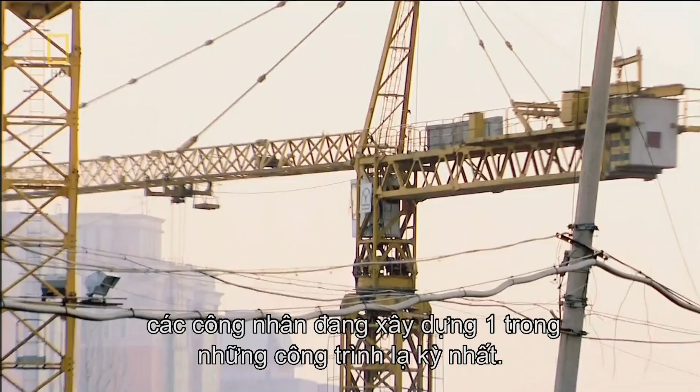In Beijing, China's capital, workers are constructing one of the most astonishing buildings ever built. When Beijing lights the Olympic torch, the eyes of the world will be on the incredible National Aquatic Center, a gigantic greenhouse that heats and cools itself, with a skeleton so strong it could stand on end and shrug off an earthquake, and a wafer-thin skin that puts out its own fires.

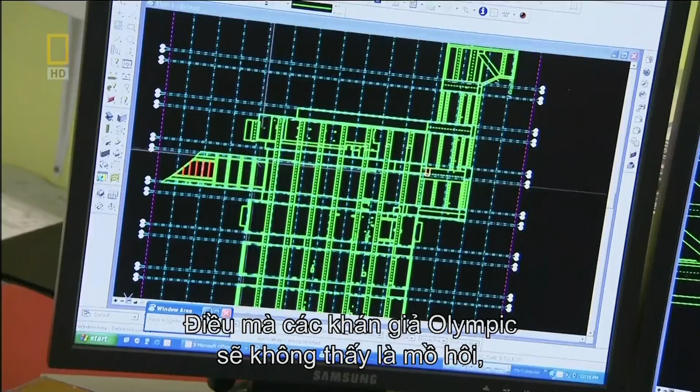Can you imagine building a building out of this? Essentially, we're building a building out of bubble wrap, you know? I have to say it's perfect. Okay. What the Olympic crowds won't see is the sweat, brains and guts that got this megastructure built. The struggle to believe in the incredible. I think we're all a bit stunned, really. But you want to do what? The lives put on hold. My wife didn't want to speak to me for a while. And the hard hat high wire acts 30 meters high. It looks a bit crazy, but it is safe.

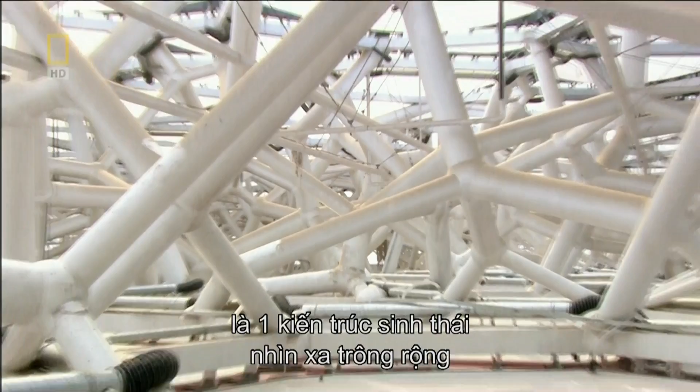The National Aquatic Centre's a visionary piece of eco-architecture and a brilliant monument to 21st century China. And it's also a tribute to a team that conquered fear and doubt and didn't quit until they'd made the impossible a reality.

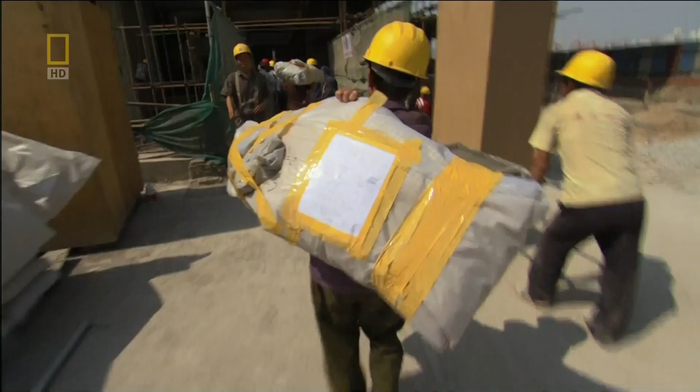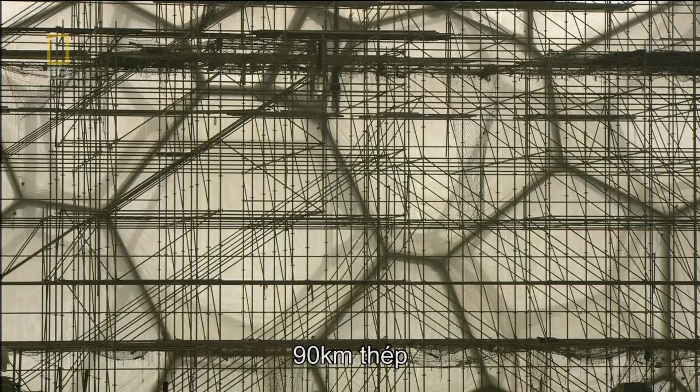Beijing. Building materials arrive at a construction site. Hardly unusual in this construction-crazy town. But these building materials and this building are different. Really different. 90 kilometers of steel, 22,000 beams, following no conventional straight lines, a maze of metal. That's enough steel to circle more than 200 Olympic running tracks.

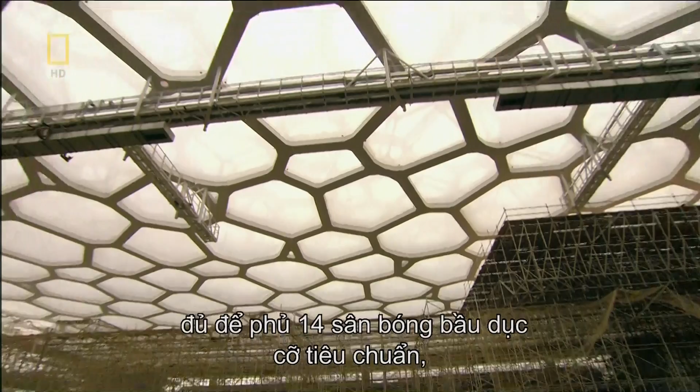And it's covered with plastic, 100,000 square meters of it, enough to cover 14 full-size rugby pitches, cut into cushions as big as 9 meters in diameter, but only 0.2 of a millimeter thick, nearly 8 times thinner than a penny. Officially, it's called the National Aquatic Center, but in the world of mega architecture, it's known as the Water Cube.

It's a fantastic honeycomb that looks as light and fragile as a tinker toy. But in reality, it weighs 6,500 tons. That's almost as heavy as all the metal in the Eiffel Tower. And inside its walls and ceiling, nothing but air. There is nothing else like it. Who came up with this amazing building?

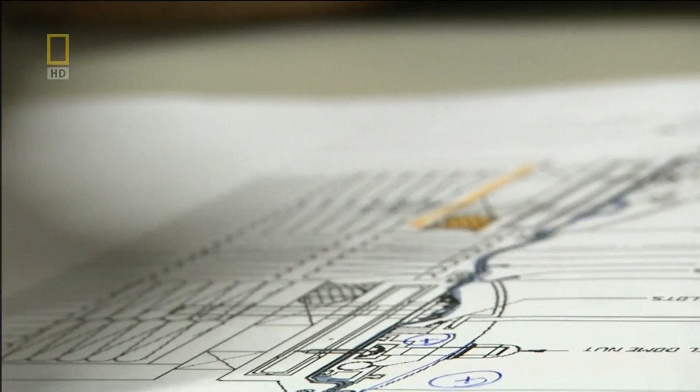Engineering team leader, Tristram Carfrae. Architects John Bilmon, Mark Butler and Chris Bosse. Fire engineer Marianne Foley. Structural engineer Mark Arkinstall. Building modeler Stuart Bull. Environmental engineer Haico Schepers. Chinese design team project manager Yi Hongtao. Part of a 100-strong architectural and engineering dream team. A team that envisions the original, the astonishing, and the apparently impossible, and made it into a megastructure.

Sydney, Australia, 2002. The architectural firm of PTW and the structural engineers of Arup, Australia team up with a Chinese consortium led by China State Construction Engineering Corporation and go after one of the world's most coveted construction contracts. From day one, the pressure's on, because they're literally racing the clock. A giant clock in Beijing's Tiananmen Square, counting down the hours and seconds to the 2008 Summer Olympics.

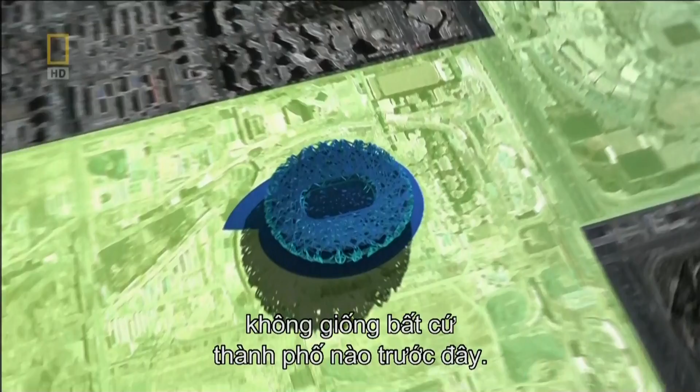China has invited the world's greatest architects and engineers to transform Beijing into an Olympic host city like none ever seen. The Chinese-Australian team's goal: to design and build the Olympics' prestigious swimming venue. And right away, they run smack into a heart-sinking challenge. The Olympic National Stadium, aka the Bird's Nest. A mind-blowing masterpiece only 1 kilometre from the site where the swimming centre would stand.

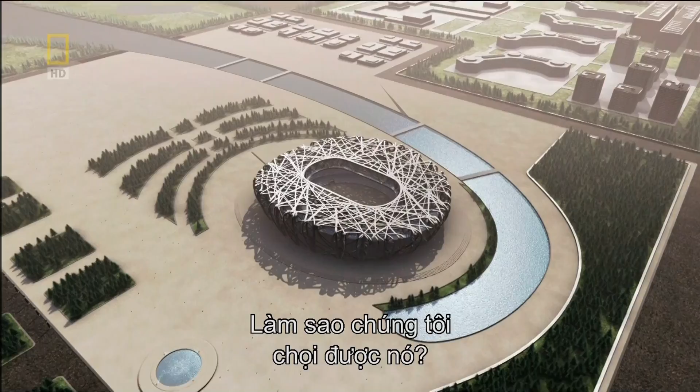When we saw the stadium design, I thought, oh, jeez, how can we match this? We were going to set our aims to create a building that was equal to the stadium, and then we saw the stadium design, and I think all our hearts fell on the ground for that moment. We just thought, oh. The team searches for a design that will knock the judges' socks off. And searches, and searches, and searches. And then, after nearly 6 weeks of failure, and with the completion deadline looming, the eureka moment.

Soap bubbles. Despite their random appearance, soap bubbles always cling together in regular patterns, in 12 and 14-sided cells, nature's most efficient division of space. And despite their flimsy look, an infinite array of connected soap bubbles has a geometry that's just right for a high-tech building. Strong enough to be the model for a megastructure.

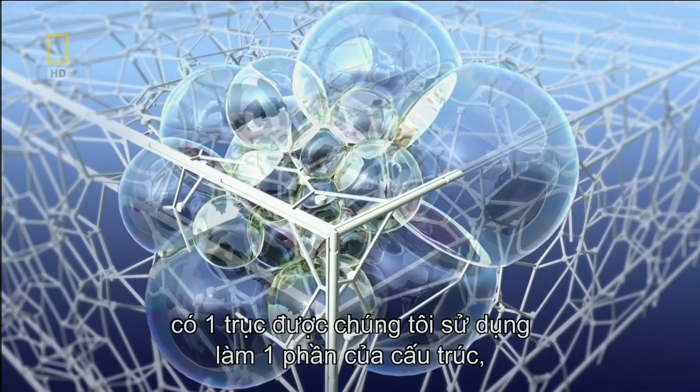3 soap films always come together at 120 degrees, like a Mercedes symbol. And along that line, where the 3 films come together, there is an axis that we can use as a piece of structure. So we can put a pipe down that line. Those lines always join 4 to a node. We can stick a joint in, we can pull in 3 more pieces, we get a structure. At last, the team has a design bold and original enough to win the competition. What they don't have is time.

I probably slept 2 or 3 hours a day. I took a nap when I felt tired, and an hour later I'd get up to work. Almost everyone in our team was the same. Everybody's eyes looked like rabbits, very red.

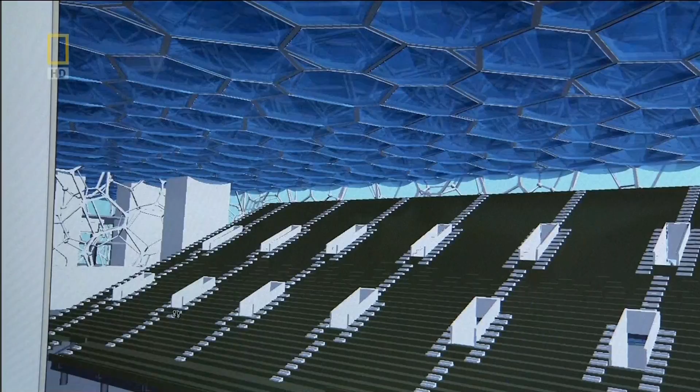We had tremendous pressure. After we agreed on the Water Cube's design, we had 5 weeks to prepare a building of this complexity. It was extremely hard. Hardest of all, making a model to show the judges what the finished building would look like. No one knows if modeling such a complex building in only 5 weeks is even possible.

Well, we were desperate at the time. We had 2 weeks to go, and we did not know how we were going to make our model. In Melbourne, they find a company that's at least willing to try. ARRK Australia specializes in a process called rapid prototyping, using a computer-guided laser to carve a model of a new product out of a vat of liquid epoxy, by etching it in layers only 1/100th of a centimetre thick.

Over the years, most of its clients have asked for models of products like water jugs, toothpaste tubes, and auto racing helmets. And then, in 2003, prototype manager Peter Lucas gets an urgent call from the Watercube team. They'd spoken to other model makers who said that they couldn't make this design. So they approached us and we were really their last port of call as far as getting a model made. We wanted to do it because it was a difficult model, and it was something a little bit different from the normal day-to-day jobs that we do.

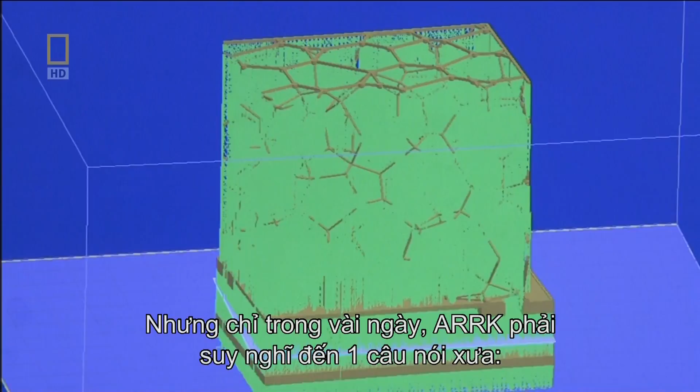But within a few days, ARRK is pondering that old saying, be careful what you wish for, you might get it. The machine kept crashing. The file was so big, it was like a 20 meg file, and most files we're dealing with are sort of 2 to 5 megs. The darkest hour was when we thought, no, we can't do this.

So what we decided to do was to grow the Water Cube in sections, and what PTW, the architects, did was that they came down with hand luggage, and we loaded each section into the hand luggage, and they flew it back to Beijing. I think the time pressure was down to hours at that stage. The finished model just meets the competition deadline. The team waits for China's decision.

They know that losing will be hard, but they also know that winning and having to build something never built before might be even harder. July 2003. After nearly 4 months of 7-day weeks and working day and night, the Watercube team gets the news. Voting online, the Chinese people have picked the Watercube design to be the Olympic swimming center. The team's reaction: rejoicing, followed by panic.

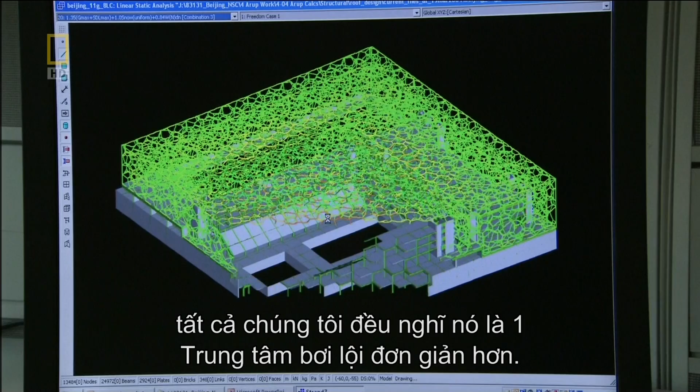And really it was only when they came back from the competition and actually had some images and this is what it's going to be. And I think we all had in our minds that it was some sort of simpler swimming centre. I think we're all a bit stunned, really. Like, you want to do what?

There's been an immense effort to win. And when you're in a winning mode, you don't necessarily focus on all the difficulties that are ahead. You want the job. You've won the job, we sit down, we look at it, and there is a bit of a heart sinking, I think, a sort of, oh my God, can this actually be done? And in fact, Chinese authorities were asking the same question. China had voted for a building like no other. Now, its designers had to prove they could actually build it.

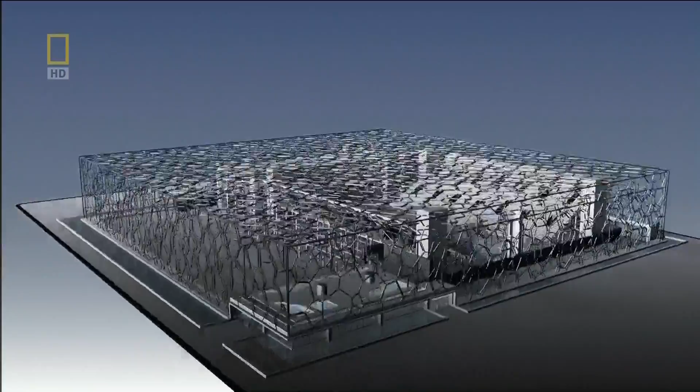The Watercube's gigantic steel honeycomb had 22,000 steel beams, following no conventional straight lines. A crazy-looking pattern. Its roof and walls would have to be 100,000 square meters of bubbles, made of something light enough and flexible enough to cover this apparently random maze of steel, but strong enough to stand up to Beijing's desert sandstorms, broiling summers, and sub-freezing winters. Glass, too heavy and brittle. Concrete, a design disaster. The answer came from way outside the box.

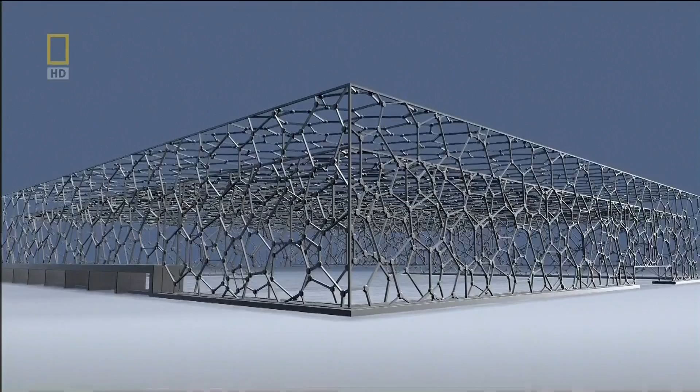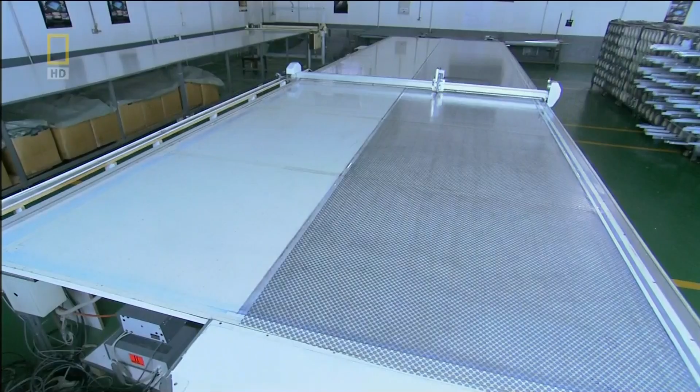Meet the amazing ETFE. That's a piece of ETFE. Fantastic, isn't it? Can you imagine building a building out of this? ETFE stands for ethylene tetrafluoroethylene. Chemists call it fluoropolymer. The rest of us call it plastic. So essentially, we're building a building out of bubble wrap.

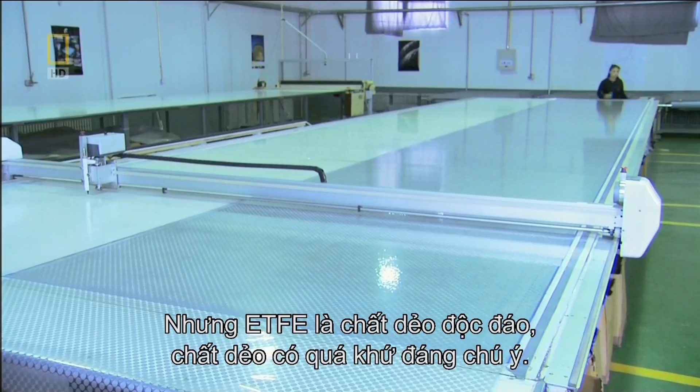It may look like freezer wrap or a dry cleaning bag, but ETFE is a plastic like no other. A plastic with a past. In 1938, an American chemist at DuPont Chemical Company was experimenting with gases and accidentally created a new substance, known around the world as Teflon.

Since 1960, Teflon's helped millions in the kitchen. But most people have no idea it hasn't always been a labor-saving coating on their frying pans. Originally, Teflon had a much more serious purpose. During World War II, scientists used it to coat the gaskets inside the first atomic bombs to prevent corrosion and ensure success. Just 50 seconds later, 15 miles from ground zero, the Enola Gay rocked by the blast.

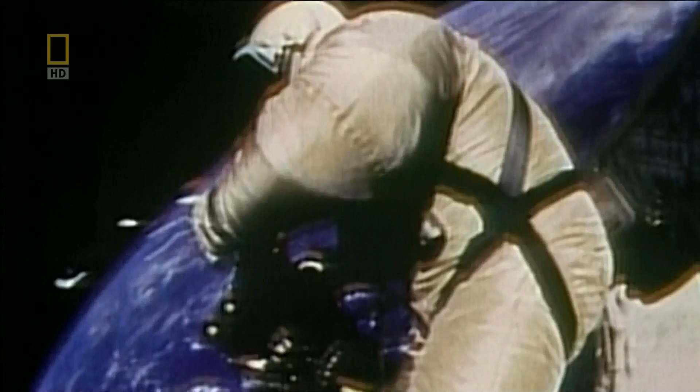By 1970, America was sending spacecraft and astronauts beyond Earth's atmosphere and needed to protect them against cosmic radiation. So NASA and DuPont tweaked Teflon's chemical structure and created ETFE. The 1960s and 70s also saw the rise of the geodesic dome and other architectural innovations. And it wasn't long before architects and engineers grasped ETFE's potential. The miracle plastic that had once helped transform cities into rubble would now help transform them into futurescapes.

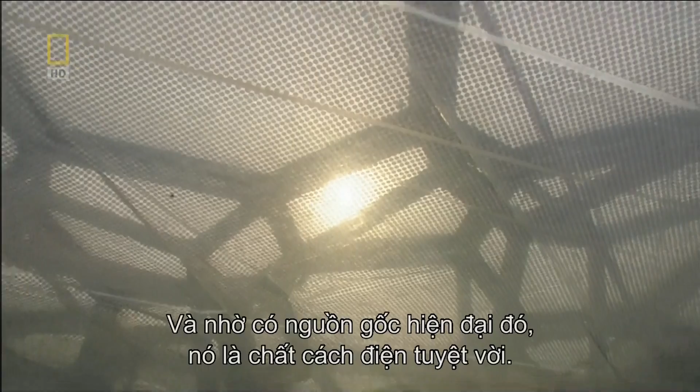The sun's ultraviolet rays can't hurt ETFE. Samples created decades ago still look brand new. It's just 1% of the weight of glass and much more flexible. Incredibly, it's also more transparent than glass and lets in more light. And thanks to its space-age origins, it's a superb insulator.

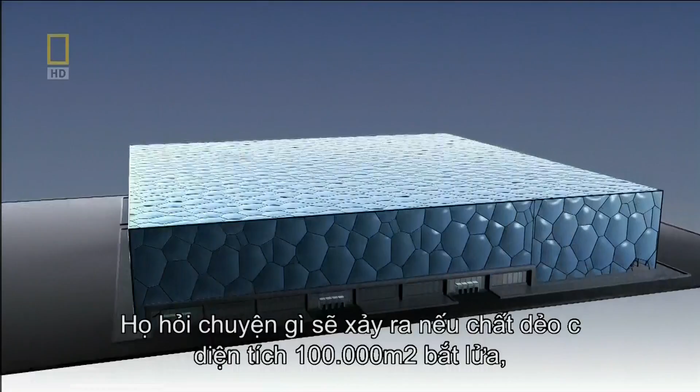Today, ETFE covers some of the world's most impressive structures, like the Eden Project in Cornwall, England, and Munich's Allianz Arena, host site of the 2006 World Cup. But the Water Cube's 100,000 square meters sets the record as the biggest ETFE construction in the world. An impressive statistic that worries Chinese officials. They ask, what will happen if 100,000 square meters of plastic catches fire, with 20,000 Olympic spectators inside?

To win approval for ETFE, Arup's lead fire engineer, Marianne Foley, has to change some minds fast. And the first mind she has to change is her own. When I was first presented with, this is what we're going to do, it's like, you've got to be kidding, you're going to cover the building in plastic. Because, obviously, there's going to be huge flames licking up the side of the building, and that's not going to be good. We all have visions of what plastic may do in the event of fire, and we're envisaging big fires and raining flaming droplets down, and plenty of plastics behave like that.

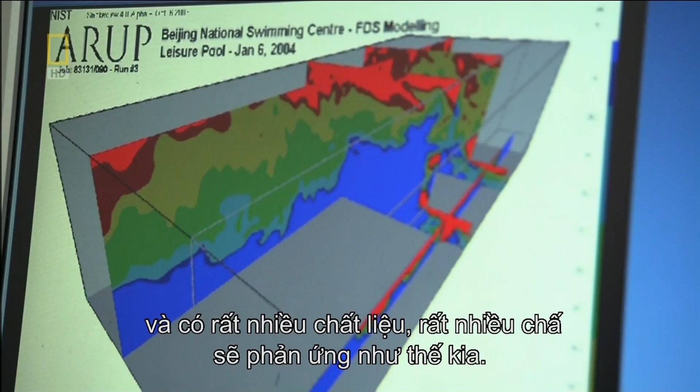But Foley soon discovers that ETFE doesn't behave like other plastics. She researches the worst-case scenario, a fire in the Water Cube with some 20,000 Olympic spectators inside, and asks, what will those 20,000 people see? But you're not going to see what the movies show you, for example, of flames licking up the outside of a building and the towering inferno kind of stuff. You're not going to see any of that. The likelihood actually is you would see nothing at all, which is a terribly boring answer.

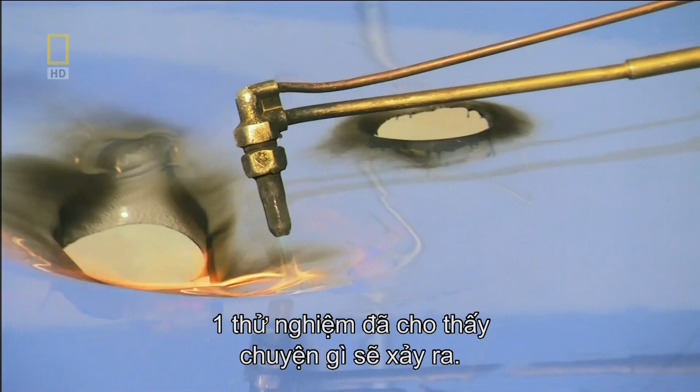Inside the cavernous Water Cube, flames will have a hard time reaching the ETFE skin. But what if they do? At the Water Cube's ETFE factory in Beijing, a demonstration reveals what will happen. If a fire does reach the ETFE skin, the skin won't burst into flame. Instead, ETFE will just melt away. But only as long as the flame stays on it. Take the flame away, the melting instantly stops.

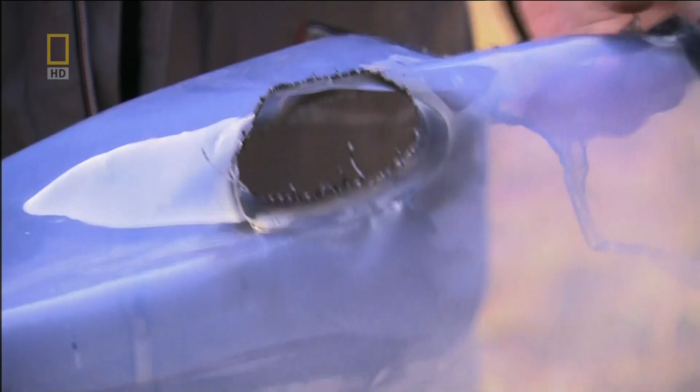It looks like magic, but ETFE expert James Murphy knows it's just good chemistry. ETFE has a chemical in it, fluorine, sort of like the chemical that's in your toothpaste, and that puts out the flame. The fluorine in the ETFE prevents enough oxygen from being present to sustain fire. No matter how long fire touches it, ETFE doesn't burst into flames. It melts and drops away. And that's a big benefit because it allows all the harmful gases and smoke out of the building, and that allows people to see and get out safely.

What you're essentially going to see is what looks like a very large piece of cling wrap shrivelling away from a lighter flame. And it's just going to shrink away, and you're just going to get a hole. And then people evacuating. The design team proves that if the Water Cube's skin caught fire, it will simply wrinkle up and blow away.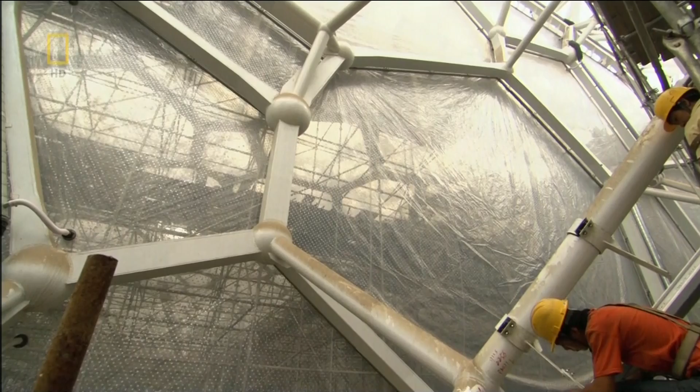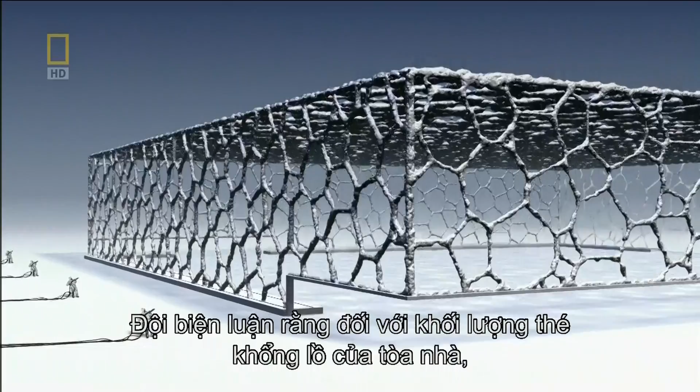But what will happen to its immense steel skeleton? A fire can make steel so hot it weakens and gives way. China's fire code requires spraying steel with a fire-resistant chemical coating. Very effective and very ugly. The team argues that given the building's vast amount of visible steel, fireproof slurry will make an Olympic masterpiece look like a gigantic bowl of porridge.

It's a terrible material, actually. The idea that we would have had to do that to that building, it just makes me laugh, actually, because there's just no way. But to win that argument, the Watercube team has to prove that their steel honeycomb will survive a fire on its own. And that means burning some midnight oil.

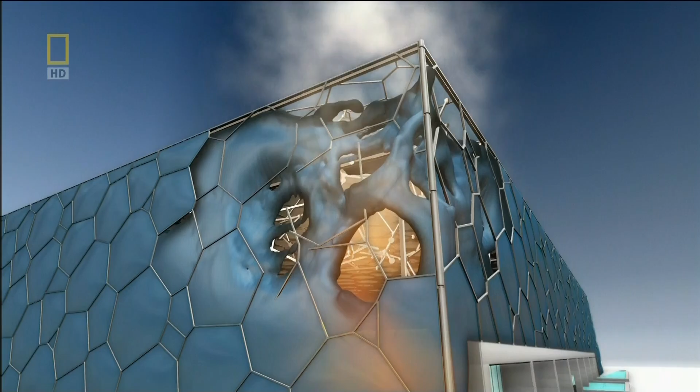In here that we have the problem with the two beams. We had to look at how fires in the building would affect this very intricate structure. That level of complexity was not something I'd done before, and it's not something you would normally do. Foley painstakingly analyzes the Watercube's design to determine where fires are likely to break out and what part of the building will be most vulnerable to fire, while her fellow engineer, Mark Arkinstall, calculates how strong the steel frame will have to be to withstand a fire

without a protective coating. My role as fire engineer was to work out what sort of fires we could have, like how big were they going to be, how close to the steel would they get, and from that to work out what a temperature distribution would be. So what temperature was it going to be where on that steel? And then Mark took over from there and he worked out what that would do to those elements that were exposed to the high temperature, and where that temperature was such that the element would no longer carry the load. If that stopped doing that, what did the rest of the structure do?

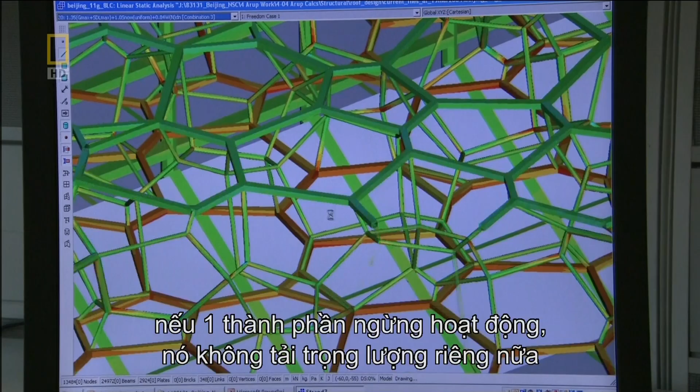To their vast relief, this analysis reveals that the Watercube's steel honeycomb will survive a major fire. If any beams melt in extreme heat, the surrounding beams will shoulder the load and keep the building from collapsing. 20,000 Olympic spectators inside the Watercube are now looking safer.

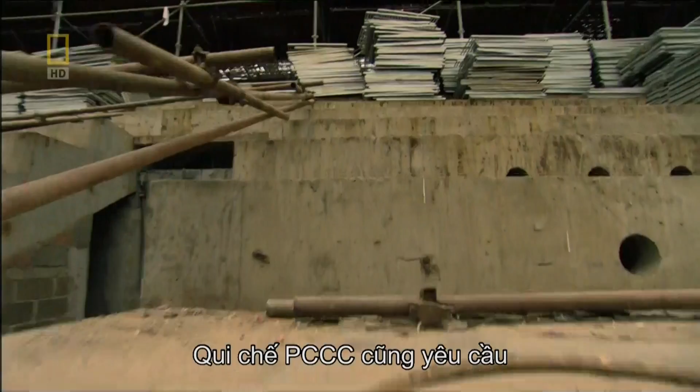But the Watercube still has to satisfy one more fire regulation, and it's another potential design wrecker. The Chinese fire code requires a building holding 20,000 people to have 200 meters of exits, nearly the same length as one side of the Watercube. The code also requires public buildings to have fire-protected enclosed spaces like stairwells leading to fire exits. But the Watercube encloses nothing. Inside, it's a vast open space. So the design team goes back to the drawing board and goes the extra mile to convince authorities that their design is safe.

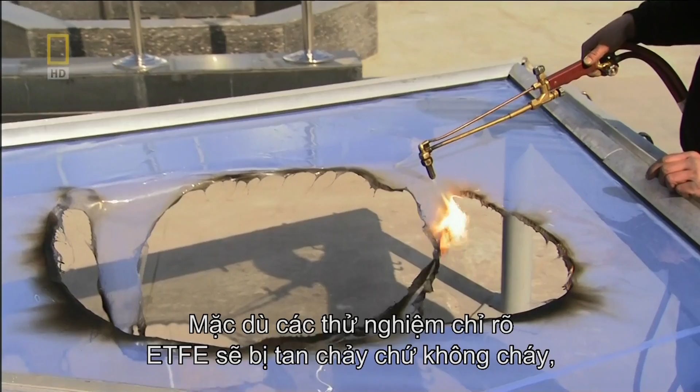Even though tests show that ETFE will melt, not burn, and will allow smoke to escape a burning Watercube, Marianne Foley models the probable pathways smoke and flame will take and positions sprinklers and smoke extractors along those routes to make doubly sure that fires will go out and smoke will be sucked out of the building. She argues that with these extra safeguards in place, enclosed escape routes and 200 meters of exit doors aren't necessary

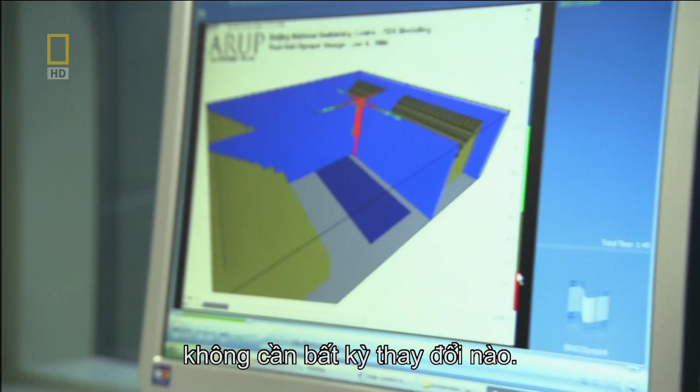or even effective. People don't actually use those. They don't like them, they don't know where they go, they're afraid of them. We all like to leave a building the same way we came in, or at least a way we've mind mapped. So we know how to get out, we know where we're going to go, we know what it's going to look like. Impressed with the team's arguments, Chinese fire experts approved the Watercube's design without any changes. It was wonderful. Our peer reviewers said that we had essentially done state-of-the-art engineering, that they thought what we'd done was fantastic and that they fully supported it, which is nice to hear.

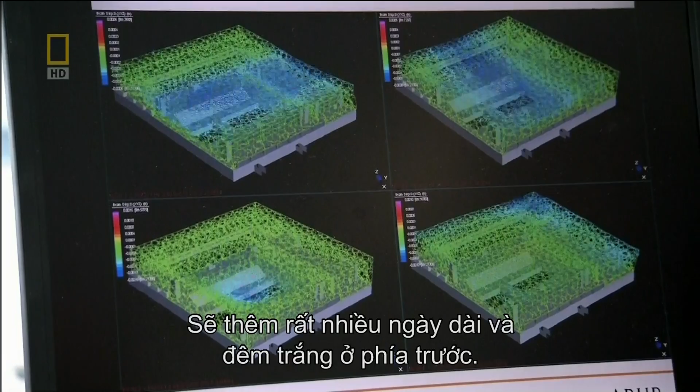But fire isn't the only thing the authorities were worried about. Can the Watercube's gigantic honeycomb survive in one of China's deadliest earthquake zones? There will be plenty more long days and sleepless nights to come. In 1976, a single earthquake killed 240,000 people, only 180 kilometers from Beijing, where the Olympic Swim Center will stand. With the Olympic countdown clock ticking, the heat is on to prove the Watercube can survive an earthquake.

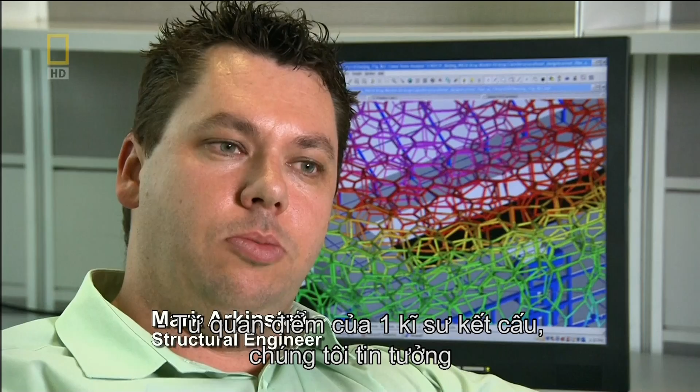And Arup engineer Mark Arkinstall is definitely feeling that heat. From a structural engineering point of view, we had to be confident that this very complex building would stand up in Beijing with earthquakes, wind, snow, you name it. And it's not just like designing a warehouse. It's actually the Watercube. It's just so much more than anything you'll ever see anywhere.

The challenge: how to make the Watercube's steel honeycomb strong enough to stand up to high winds, dust storms, snow and earthquakes, but light enough so it won't collapse under its own weight. After cyber testing 190 different scenarios, the team proves that despite its resemblance to the world's biggest tinker toy, the Watercube will fare extremely well in an earthquake. But one more challenge remains. The Watercube's builders need a 3D computerized blueprint, a virtual model that assembles the entire building in cyberspace.

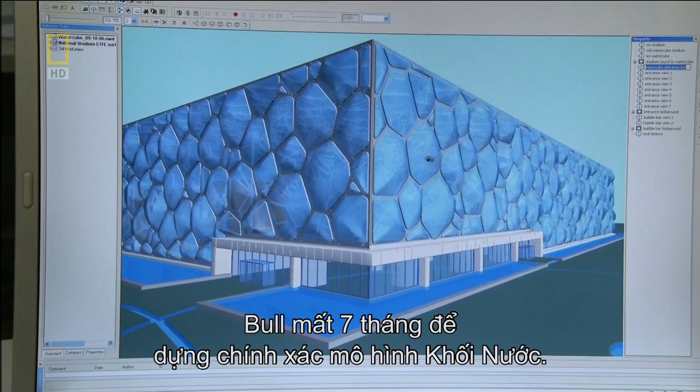And it's up to building modeler Stuart Bull to make that happen. I was scared silly. I knew that as the job went further, it would get harder for me personally. Bull has 7 months to accurately model the water cube. That may sound like a lot of time, but not for a building made of 22,000 irregular steel beams.

You then have the stress and thinking, right, I've got to get that done. I've got to get that done now. Why doesn't this work? Go back to the beginning. You get it to work the first time, but it doesn't work the second time. Why doesn't this work? We broke so many computers. They physically stopped working. It was not funny. My wife didn't want to speak to me for a while. Just puts me away in the spare room and say, well, you can come out when you're finished.

Several months and several dead computers later, Stuart Bull is out of the spare room, and the water cube's builders have accurate blueprints. Now they have to build it. Construction starts in December 2003. Workers pour the immense foundation, then begin assembling 22,000 beams of steel. It's a mega challenge, and they tackle it head on.

By August 2005, the water cube's gigantic steel lattice looms above the Olympic green. It's time to cover it with ETFE. And while building its massive skeleton calls for heavy lifting, manufacturing its super thin, super light skin requires some serious mental gymnastics. At this Beijing factory, workers are transforming huge sheets of ETFE into 3,500 water cube pillows. Every one designed in Germany.

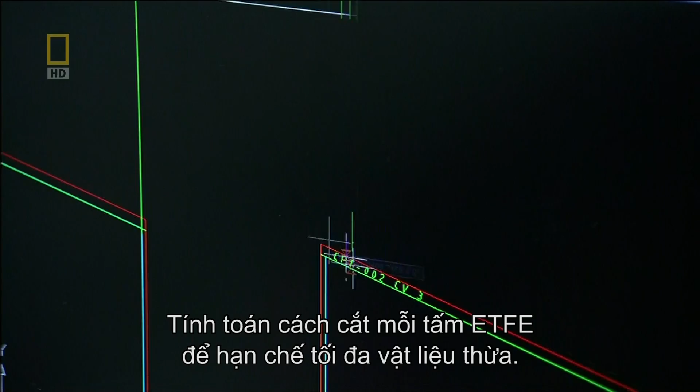In Beijing, technicians translate each pillow's unique dimensions from a German computer program to a Chinese database, calculating how to cut each piece of ETFE with the least amount of wasted material. While other workers stretch huge sheets of ETFE over a giant vacuum table, sealing them flush with the surface. Then, the computer program guides a blade as it cuts each pillow to its exact dimensions.

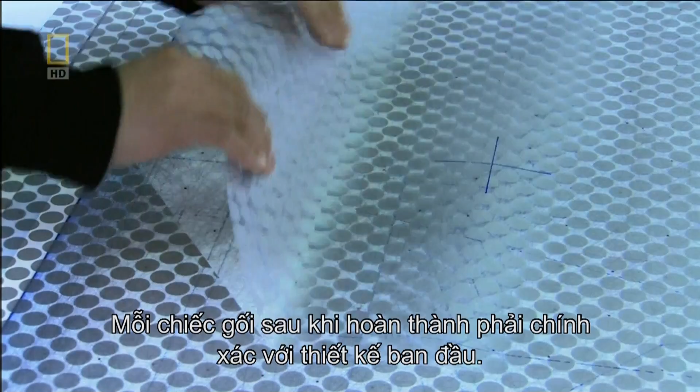Every finished pillow must be exactly as it was designed. For factory owner Stefan Lehnert, that meant some sleepless nights when manufacturing began. The thing is to have these cushions, every one of them, manufactured to the precise dimension, have it done on the right day, in the right position, for the team to be installed in time.

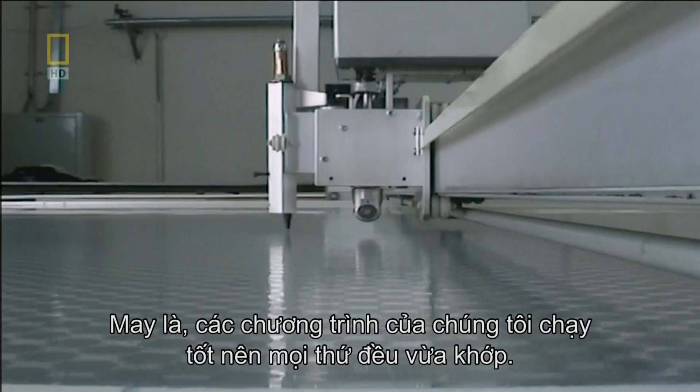If there was one thing wrong, it would have been wrong for every single cushion, which would have been a technical disaster, but also a financial disaster. Luckily enough, our programs seemed to be all right, so everything did fit. And actually, out of the 3,500 cushions, we had to do one new cushion because we actually did make one production error.

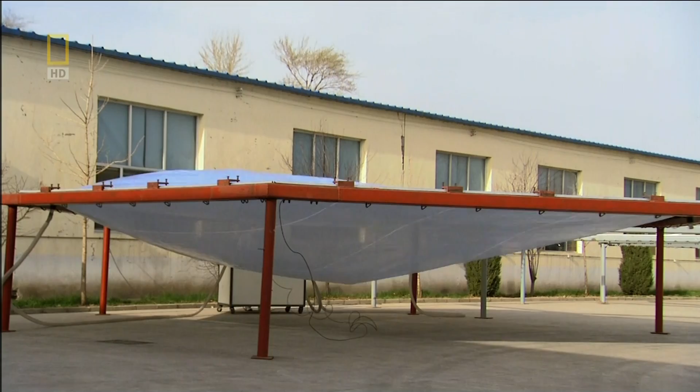From the moment they're cut to shape, keeping track of the pillow pieces becomes an obsession. They're numbered to match the water cube blueprints and stored in identically numbered bins. Workers weld a rope into each pillow's edges so that they can be clamped into an aluminium frame. Last step, quality control. The factory tests, installs and inflates every pillow. If anything's wrong, now's the time to find out, before it's delivered to the water cube. Every mistake costs time, and time is running out.

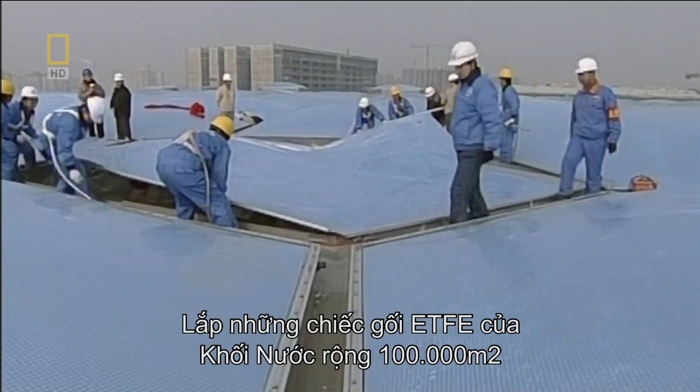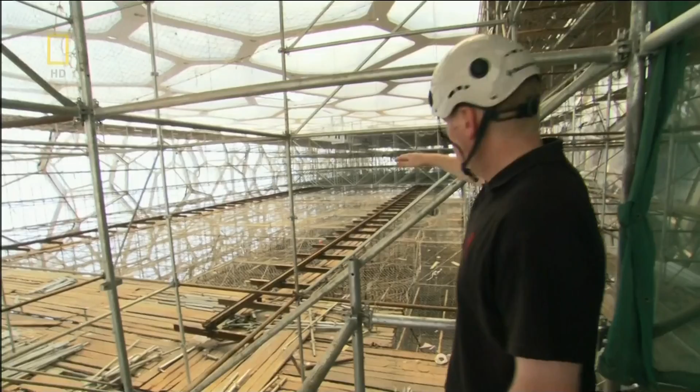Installing the water cube's 100,000 square meters of ETFE pillows isn't any easier than making them. James Murphy manages ETFE production and installation for the water cube. To get his ETFE pillows to their positions, workers must erect a massive scaffold out of hundreds of thousands of pipes. We built a rolling scaffold, and we do literally 1/3 of the building.

We put these rails in place, we finish our work in this area, and then we push all of the scaffold forward on the rail. And then we mobilize in that area, we finish that work, and we repeat the process again. The scaffold is safe. It looks a bit crazy, but we've been at it now 2.5 years, so it is safe.

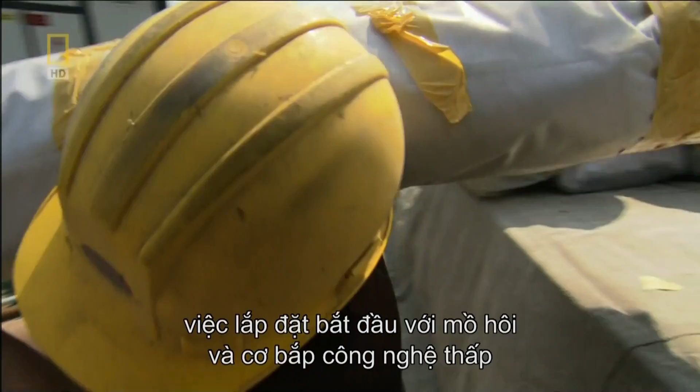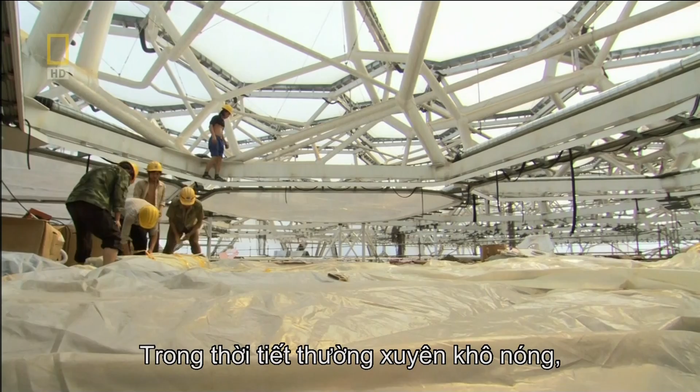Once the scaffold's in place, installation begins with some low-tech sweat and muscle, as workers hand carry the ETFE pillows over 30 meters up. And they do sweat. At the top of the scaffold, the temperature under the roof is about 10 degrees hotter than the floor where they started. In summer, it can reach over 50 degrees. In this often searing heat, workers must carefully complete the complex process of blowing some of the world's biggest bubbles.

First step, unfold the ETFE pillow and rotate it until it matches up with the frame and the steel structure it was designed to fit. Next step, clip the pillow into the framework, a critical step that's got to be done right, because the steel frame stretches the installed pillows tight in a gigantic web, balancing force and counterforce.

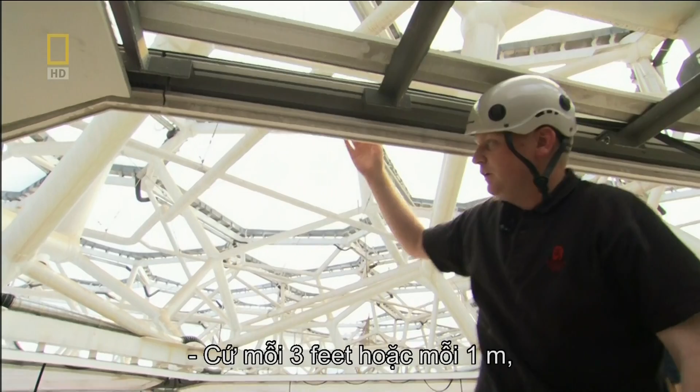You can get the equivalent of every 3 feet or a meter, about the weight of one Volkswagen Beetle pulling horizontally. That force is balanced, counterbalanced by a force from this other cushion over here coming through that bracket. So everything balances out, and that makes it an extremely efficient system.

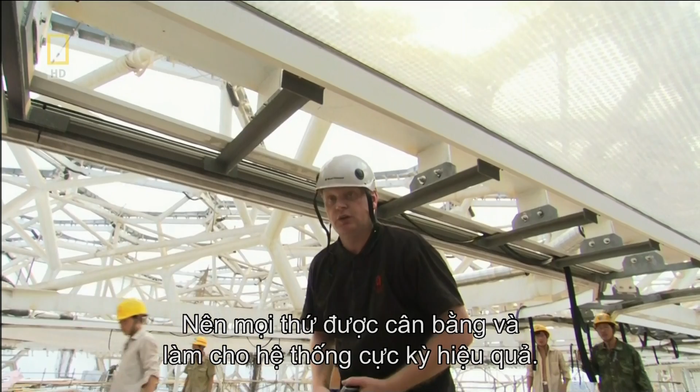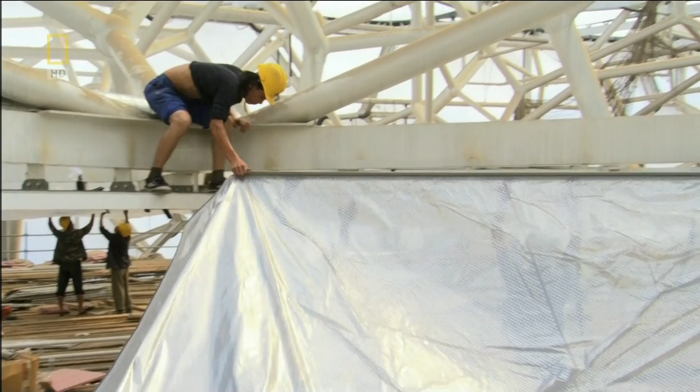Building the water cube means doing this 3,500 times. An impressive amount of work. But it's the pillow inflation system that reveals some of the water cube's most ingenious eco-engineering. Air is part of the structure.

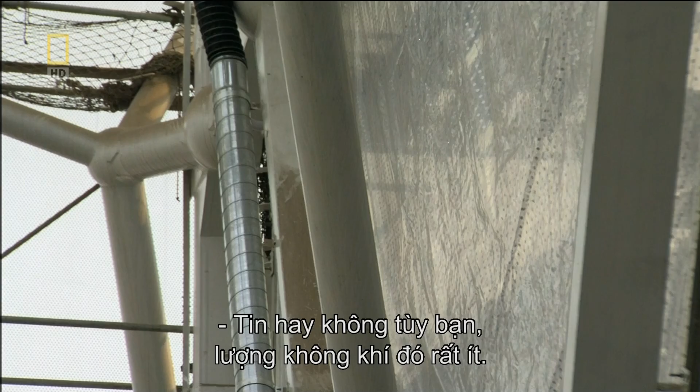The cushion is not a structural cushion without air, so air keeps our building up, which is fundamentally different from all other building systems used in the world today. And believe it or not, it's a very small amount of air, so that makes the power consumption extremely low, equivalent to your refrigerator in the kitchen. So you get very large surface areas of cushions filled with air very cheaply.

So you can see here at the base we have a big pipe that branches into a smaller pipe, and the further we go up it gets smaller. That's mainly to save on materials and to make the building more environmentally friendly, not to dump energy into the materials when it's not required.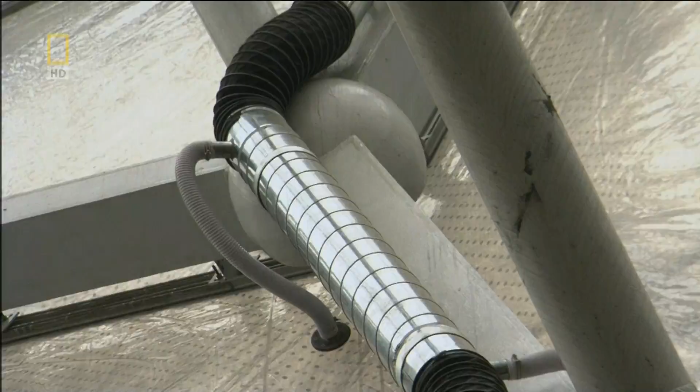But a building that's 30 meters high and 70,000 meters square must surely need an energy-gulping mega pump to keep 3,500 pillows inflated. Wrong. The water cube's divided into 18 inflation zones. Each zone has its own fans that send air to its cushions.

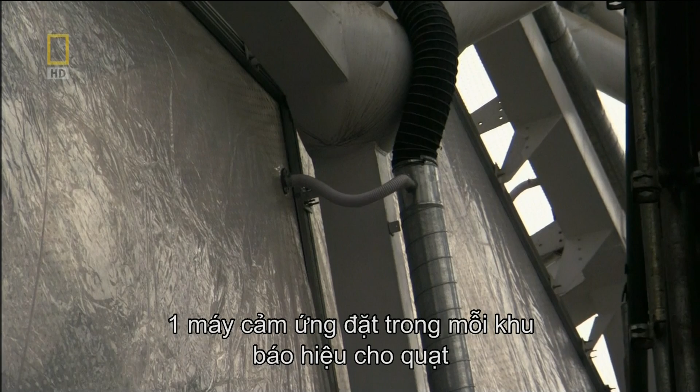A sensor in each zone signals the fans if the pillows need more air, or if it's fully inflated, turning the fans on or off as needed, using no more than the minimum required energy. An inflation system that can keep 100,000 square meters of ETFE inflated at just the right pressure, without wasting energy, is good engineering indeed.

But the building's most environmentally friendly feature doesn't need any hardware to happen. One of the key things when we design a sustainable building is we actually look at the climate. In Beijing it gets to minus 13 degrees. And that's a problem, because after the Olympics, the water cube will be Beijing's year-round swimming center.

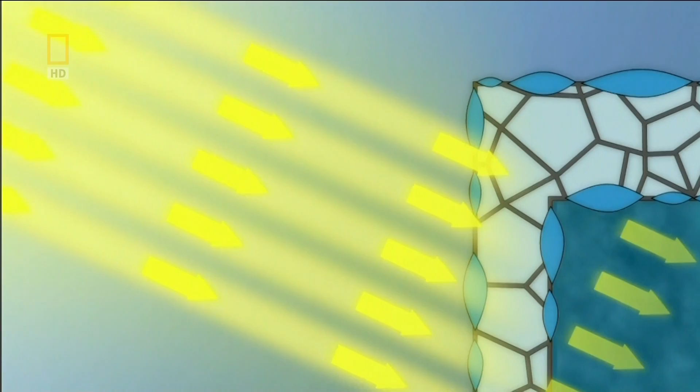You can imagine minus 13 degrees and everybody's running around almost naked. So it needs to be very warm in that space. It just makes a lot of sense to design a greenhouse to heat everything up under those conditions. Thanks to ETFE, heating the water cube in winter won't be a problem.

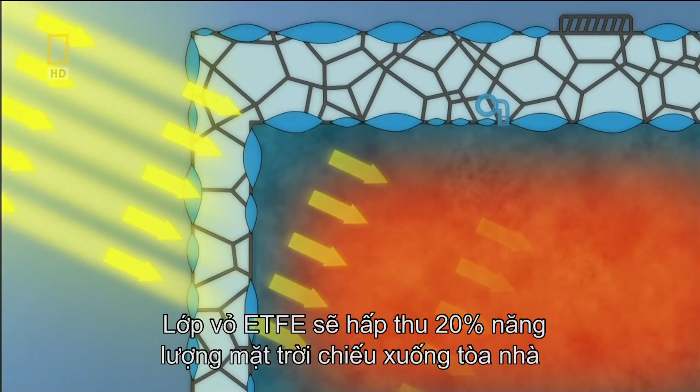Building its roof out of ETFE cushions will be as energy efficient as building it out of solar panels. The ETFE skin will trap 20% of the solar energy falling on the building and use it to heat the interior and the swimming pools, and let in so much daylight that some areas will save over 50% of their normal lighting bill.

Why did we use the transparent cushions? So that the interior could be lit by daylight until very late in the day. It saves a lot of lighting cost. At the same time, the sunlight can heat up the water as well as the interior temperature. We estimated that we can save up to 30% of energy than a conventional stadium.

ETFE's greenhouse effect makes the water cube a brilliantly sustainable building, but only for half the year. Our problem is actually more to do in summer when it is 31 degrees in Beijing, and how do we make sure it doesn't get too hot in the space. The same greenhouse effect that makes the water cube cozy in winter makes it an oven in summer. Somehow, it has to cool itself as sustainably as it heats itself, without using too much energy.

And that's where these dots come in. They look unremarkable, but don't judge them by their looks. Thanks to these dot patterns built into its skin, the water cube can efficiently regulate its temperature, keeping cool in blazing summers with minimal help from air conditioning.

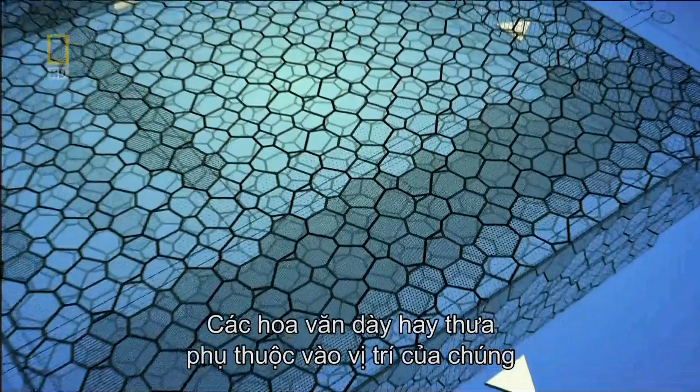The dots reflect solar energy away while letting daylight in. The thicker the dot pattern, the more heat stays out. The thinner the pattern, the more heat gets in. And how thick or thin the pattern depends on where it is. We change the amount of frit on each cushion based upon what activity is happening in the room.

We're standing in a place that will be a bar eventually, so during the day people will be sitting down relaxing. They don't want to be overheated by the sun energy coming in and making the place uncomfortable. So we put a very high density, many dots close together, up to 55 or 60% of the surface area in these areas, which allows us to reduce the cooling load by up to 40%, which is extremely efficient.

So when you look around the building in here, we have less than 20% frit on this cushion. On the outside we have 50%, and then around the structure we have about 10%, which again optimizes every part of the building to reflect out that heat energy from the sun, but to let in the light energy to cut down on the artificial lighting needs for the building. And that is basically the magic and wonder of frit on ETFE cushions.

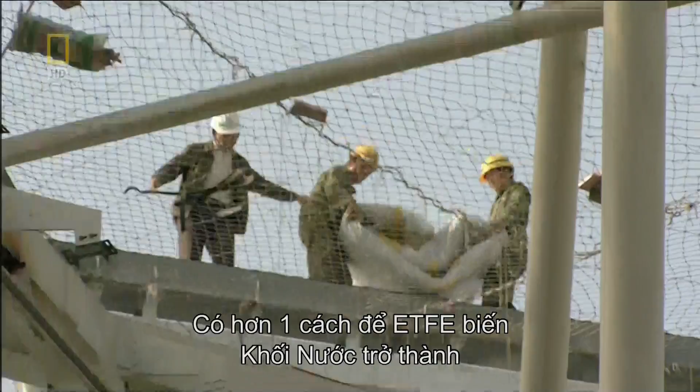And there's one more way that ETFE makes the water cube a wonder of sustainable architecture. Something that explains why these workers have to toil in temperatures up to 50 degrees. When it's finished, the ceiling they're installing will be where the water cube stores its own self-generated energy, between outer and inner layers of ETFE.

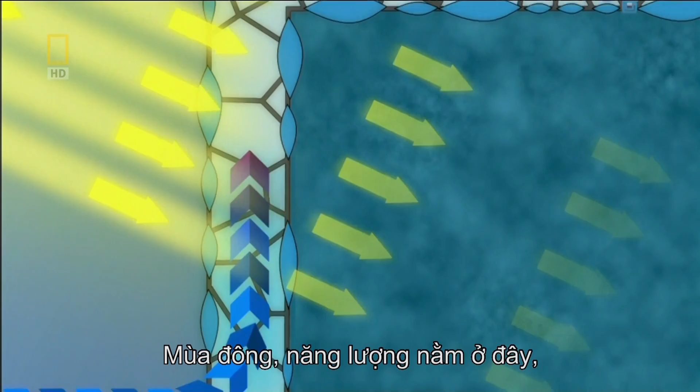We have two skins of these ETFE bubbles, and we capture the energy in between the two skins. In winter, that energy stays where it is. We essentially seal the whole box and capture all that energy. In summer, we ventilate that out. We open up the ETFE bubbles at low level and high level, and we flush that energy back out of the building.

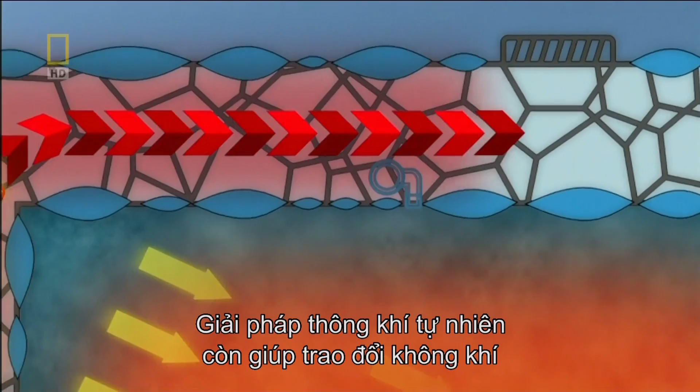We have seat fans for audiences. It only lowers the temperature within the spectator area. The athletes won't be affected. They are quite sensitive to the temperature change. Also, our natural ventilation solution helps exchange air between inside and outside. We save heat to heat up the pool. We also save rainfall for the water.

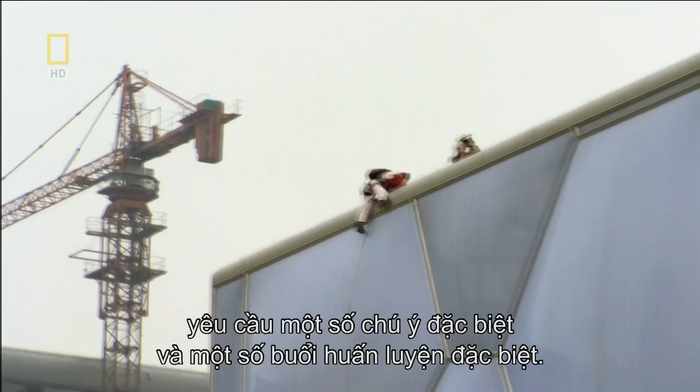ETFE seems invincible, but even this super plastic has an Achilles heel. ETFE can withstand decades of ultraviolet radiation and heavy loads of wind and snow. But it's so thin, you can cut it with a knife. Maintaining a building made of 100,000 square meters of wafer-thin plastic in a hot, cold, wet, dusty, polluted urban world requires some special attention and some special training. Water cube maintenance isn't like caring for other buildings, and it's not for the timid.

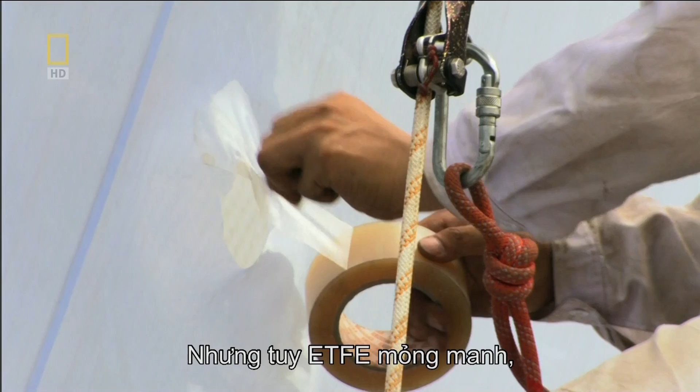ETFE supplier Vector Foiltec trained a special Chinese team of abseilers to inspect and repair the outside pillows. Today, one of those workers finds and fixes a small hole torn in a pillow when a water cannon sprayed the building to wash away Beijing's formidable dust. But even in ETFE's fragility, its champions see its strength.

Typically, when you aim a water cannon from a fire engine at any building, it tends to break, and usually it would knock a wall down. A masonry wall would be totally knocked down, but our cushion had a small hole and kept on going about its business as though nothing had happened. So what we've done now is just come down on the side of the building to create a temporary patch to stop rainwater going into the building.

And we will then come back with a much neater patch and reapply it, and then over time you won't even see the patch. The cushion has this self-healing property because it's under pressure. That's the great advantage of ETFE, where we can just make a small repair, the building keeps on going in operation, whereas if it was glass or another material, you would have to completely replace that panel, and it would be a major operation.

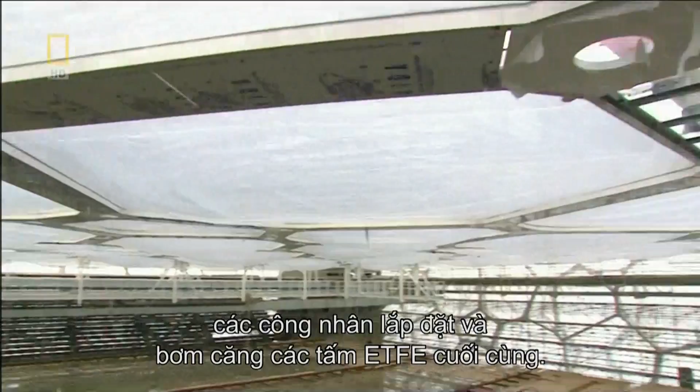Summer 2007. Inside the water cube, workers install and inflate the final ETFE pillows. Outside, its finished walls and roof are already revealing what a mind-blowing masterpiece the National Aquatic Centre will be. I don't think anybody would have walked away from this project from day one, no matter what they may have thought in their own private world, this is too hard or this is too scary. Everybody wanted to get to the end and achieve what we thought at the beginning was the impossible.

To be honest, I actually don't know to this day how we did it. It was just such an extraordinary thing. You don't get great building designs if you do what's easy. When the water cube's finished, China will proudly unveil its latest wonder of the world. It is funded by Chinese all over the world. It represents their hopes and dreams for Chinese Olympics.

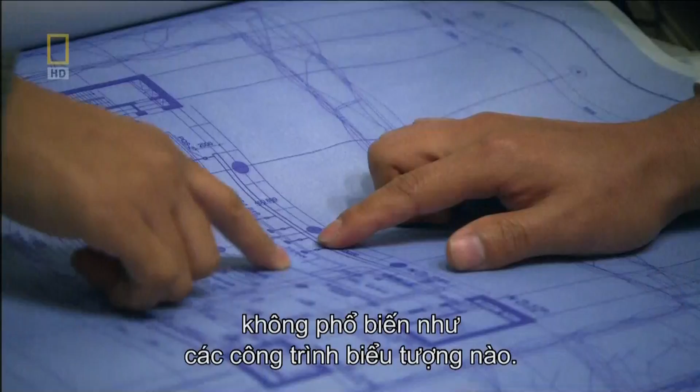Its design is under Chinese leadership, which is not common for iconic buildings. Its construction is totally by Chinese, achieved by our own innovation, so it is something to be proud of. Experts like Tsinghua University's Zhou Rong are already declaring the water cube as great as the monuments of the past, but brilliantly proclaiming the China of today.

In the 21st century, we should see the water cube as a modern-day equivalent of the Forbidden City and the Great Wall. Unlike the Great Wall, the water cube is really transparent. You can see through it. And that really is a new image for China. Now the water cube will represent that image to the outside world.

I have to say it's perfect. Okay.

On day one of the Beijing Olympics, athletes, spectators, and TV viewers everywhere will marvel at this megastructure like no other. And all the people who worked so long and so hard to dream it and build it can finally relax.